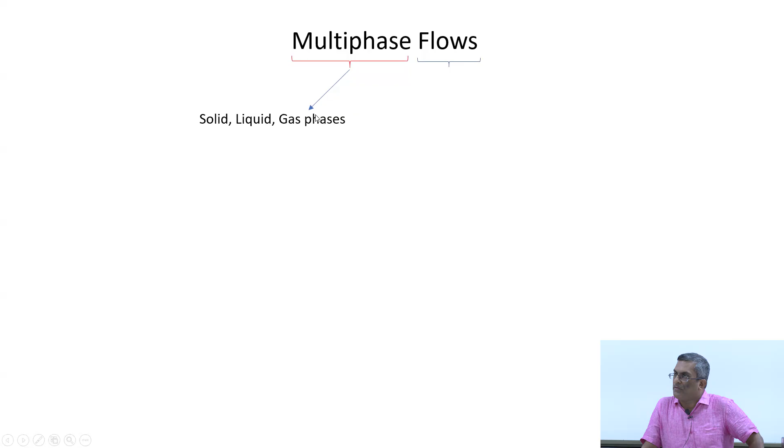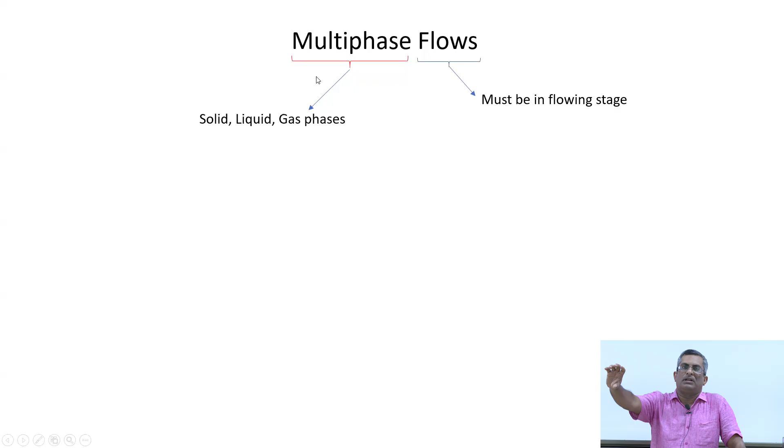Now the second term is flows. This means we must have a system which is in a flowing stage. What does flowing stage mean? Consider flow of water in porous media. Let us say you put some water in sand - the water sinks into the sand, but it actually flows through the sand. So that is an example of flow through porous media. But can we call that a multiphase flow, even though we are dealing with two phases - the solid porous medium and the liquid water? It is still not multiphase flow because we need this system to be in a flowing stage.

Another thing that needs attention is the distinction between phase and component. Are multiphase flows also multi-component flows? Here component refers to the constituents in a phase. For example, air is a mixture of gases - nitrogen, oxygen, and many other gases. These are components, but that does not mean air is multiphase. Air is a single phase flow but multi-component.

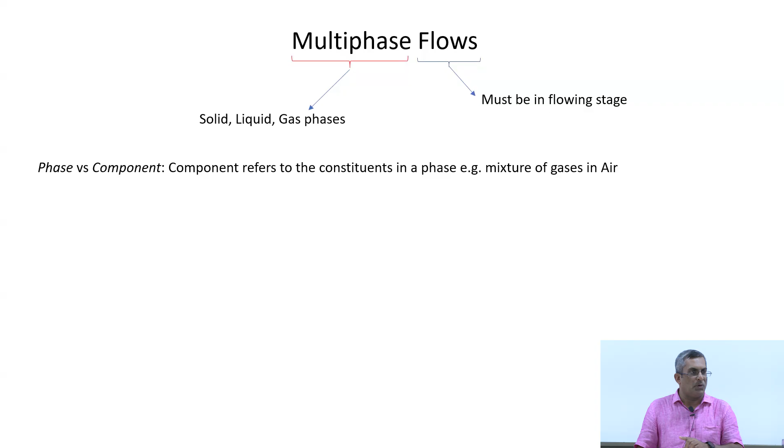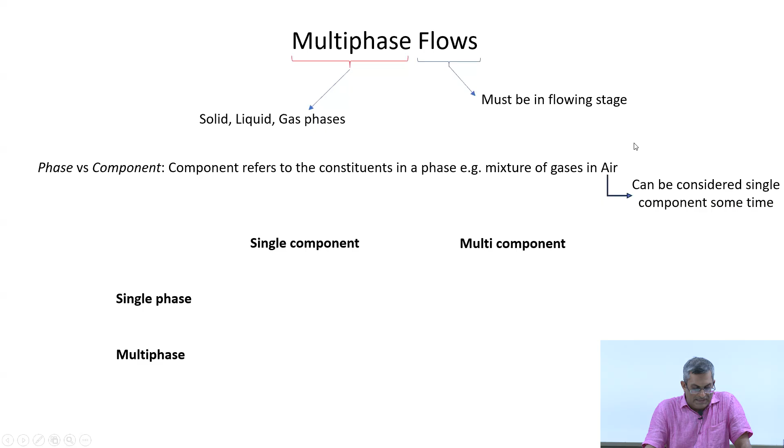So now we have different possibilities: single component and multi-component flows, single phase and multiphase flows. Can you give an example of a flow which is single phase, single component? Water, or flow of any gas - say hydrogen flowing through your burner - is an example of single phase, single component flow. Single phase, multi-component flow could be a mixture of methane and hydrogen, or exhaust gases from an engine.

What is an example of multiphase, single component flow? Steam water flow - we have water vapor in water - or refrigerant flows in a refrigerator, such as in the evaporator of a refrigerator. That is multiphase, single component.

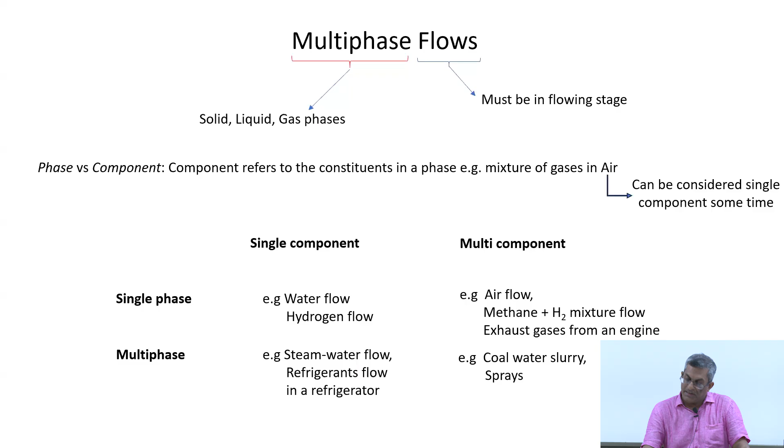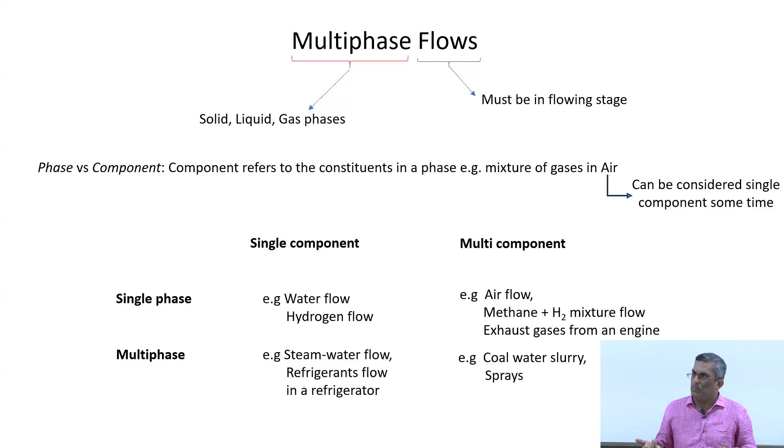Similarly, we can have multiphase, multi-component flows. For example, a spray, like the spray coming out of a deodorant. When you press the plunger, you have millions of small droplets which are injected and dispersed in air - a liquid dispersing in air. So it is multiphase as well as multi-component. Coal water slurry - coal and water - the phases as well as the components are different. So we have different scenarios possible.

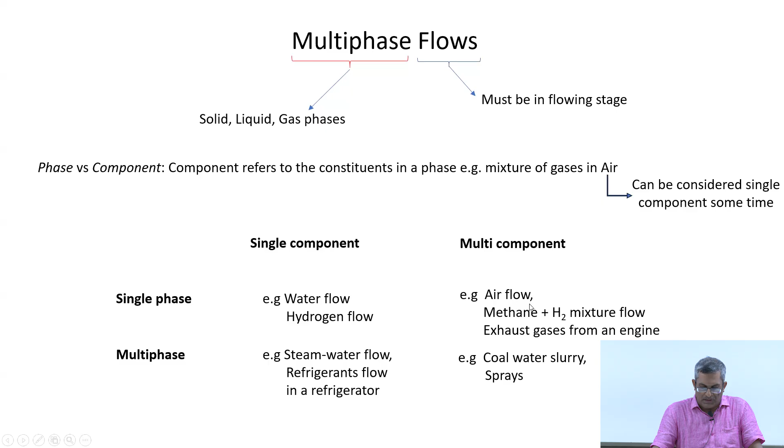Now what are the main differences between single phase flows and multiphase flows? In single phase flows, the governing equations are well established - mass, momentum, and energy equations. For gases you can also say the ideal gas law. These equations are all well known and well established, and the thermophysical properties of the fluid are also available.

What are the main concerns? Is there anything which is yet unknown? The answer is turbulence - we should not say it is unknown, but rather partly known. Turbulence and its influence on mass, momentum and energy transfer remains one of the classical unsolved problems that we know about.

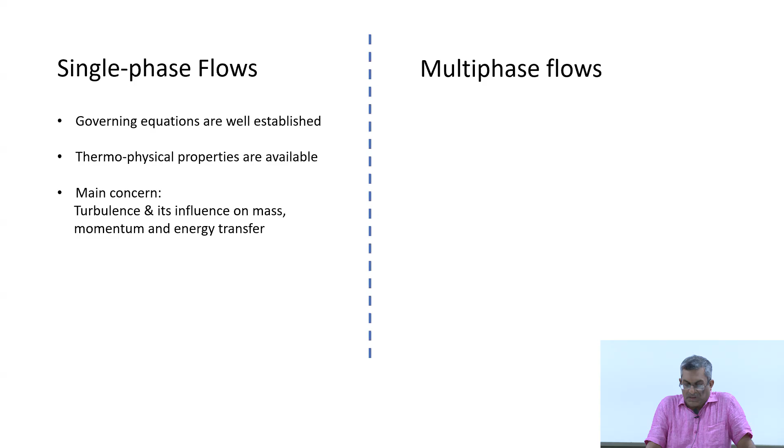Now coming to multiphase flows - the correct formulation of the governing equations is still subject to debate. Why is this so? We will see this in more detail when we discuss the transport equations for multiphase flows later. But the main reason is basically due to the presence of the dispersed phase. We need transport equations for both the dispersed phase and the carrier phase.

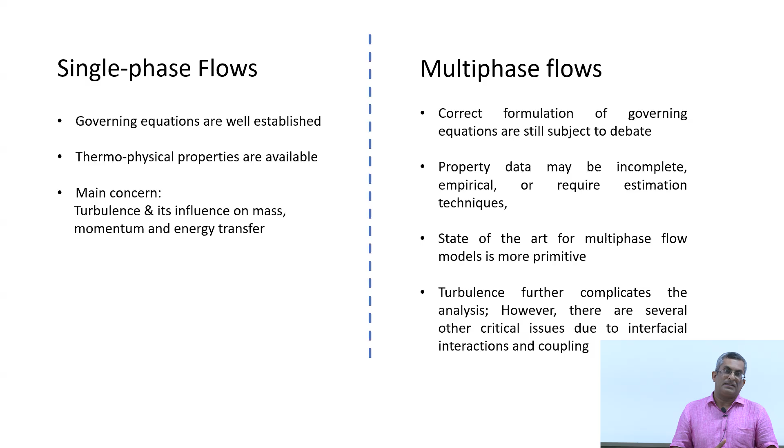They are also interrelated, and that brings in the complexity. The data on properties are incomplete, empirical, or require separate estimation techniques. And the models, the state of the art for multi-phase flow models, are still at a primitive stage. So obviously turbulence further complicates this scenario. When turbulence is not well understood for single phase flow itself, then for multi-phase flow it will bring in even more complexity. However, turbulence is not the only reason which brings in the complexity. Mainly it's because of the interfacial interactions and coupling between the phases, due to mass, momentum and energy exchange between the two phases. That is what brings in complexity.

So now we understand what multi-phase flows are. We can categorize multi-phase flows into two categories: one is dispersed flows and the other is separated flows. In case of separated flows, we still have two phases, but both phases are continuous.

What is meant by continuous? This means you can move from one point to another point in one phase without interacting with the other phase. For example, in the liquid you can move from one point to another, and the gas influences the liquid of course, but you do not have to pass through the gas. Can you think of an example of separated flows? For example, air flow over water in a pond, where you see large waves generated because of the interaction between the air and the water.

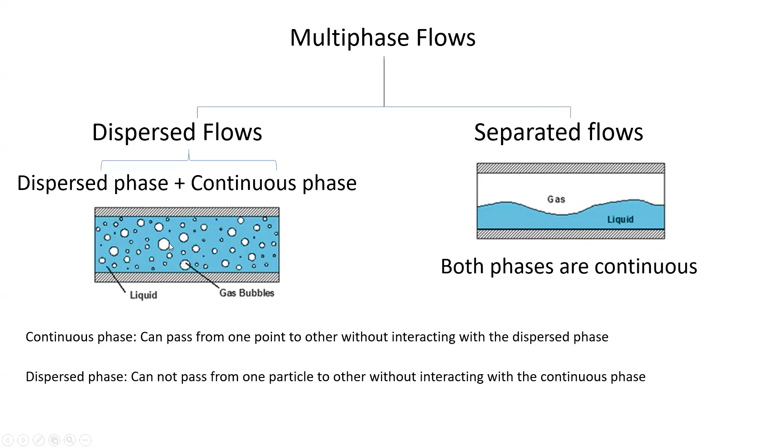Then we have dispersed flows. Dispersed flow means there are two parts to it: one is dispersed phase, one is continuous phase. In this example you can see a liquid shown in blue color and gas bubbles shown in white color. Here you can't pass from one particle to another without interacting with the continuous phase. This is a typical characteristic of dispersed multiphase flows. The dispersed phase is embedded in the continuous phase, and we need to understand the behavior of both the dispersed phase and the continuous phase at the same time. In separated flows, we also need to understand the two phases, but they interact only at the interface. That is the main difference.

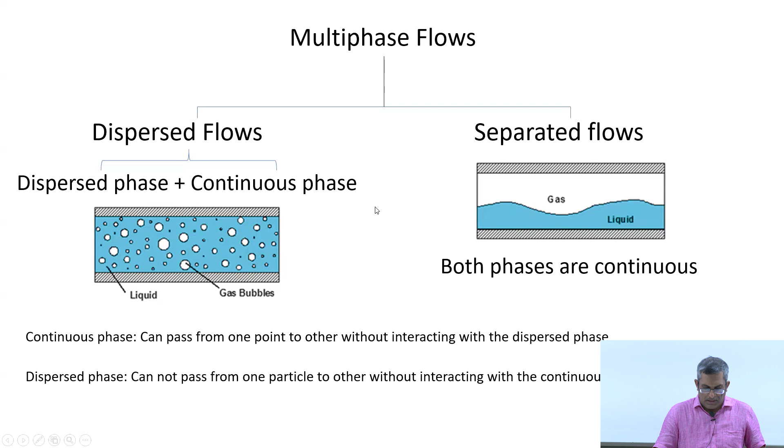But we may not always categorize flows as dispersed flow or separated flow. For example, in case of slug flows, we have large gas bubbles, and here the interfacial interactions become important, so we may not treat these large bubbles as single particles as in the case of dispersed flow. We can have even more complex scenarios, such as when we have vapor bubbles in liquid, but somehow liquid droplets are also entrained in the vapor. This kind of scenario is also possible.

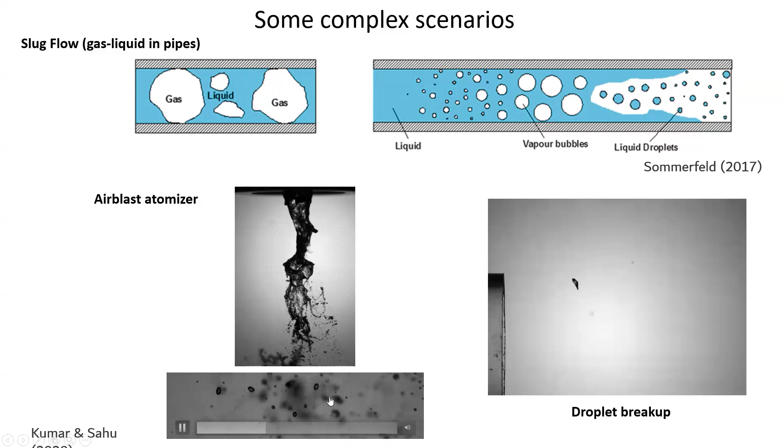Another interesting example is atomization itself in general. Here I am showing an example from an air blast atomizer. In this case you have a liquid jet injected at the center of the atomizer, but around it there is very high speed airflow that you obviously cannot see. Here you see what happens close to the injector exit, but if you go far downstream, you see the flow of droplets. Now this part we can argue refers to dispersed flow, but this one, is it dispersed flow or separated flow?

This is more close to separated flows, because here, due to interaction between the liquid and the air, instabilities develop at the interface and grow, breaking the liquid jet into ligaments and droplets. The point here is in the same device you encounter dispersed flow in some location and separated flow in some other location. So the analysis has to be different accordingly.

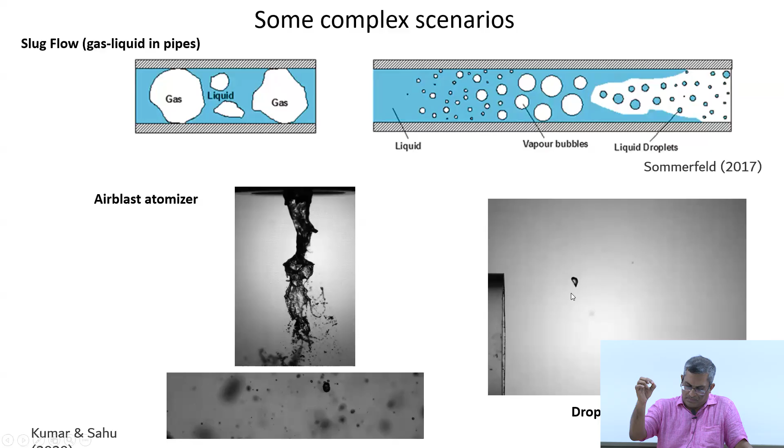This is another example where you can see the breakup of a droplet due to high speed airflow. Here you have a high speed airflow coming from an injector from left to right, and a droplet is introduced into the flow, and the droplet breaks into multiple smaller droplets.

So, what do you think, how do you analyze this? First part, till the breakup process starts. So till the breakup process starts, you have injected the droplet, and it deforms. As soon as it interacts with the air, it deforms and then breakup starts. Till that point, it may be possible to analyze that as dispersed multiphase flow.

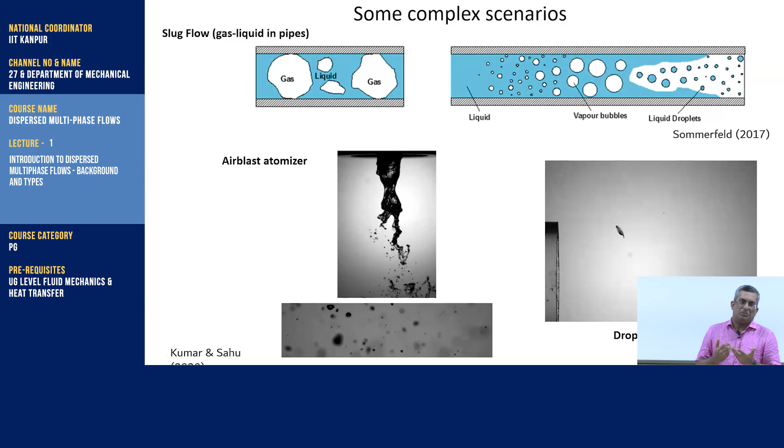But once it starts to break, you have to consider the instabilities which cause this breakup. Once the breakup process is over and you have all small droplets generated which don't further break up, that part can again be considered using the dispersed multiphase flow analysis. So this kind of scenario is also possible.

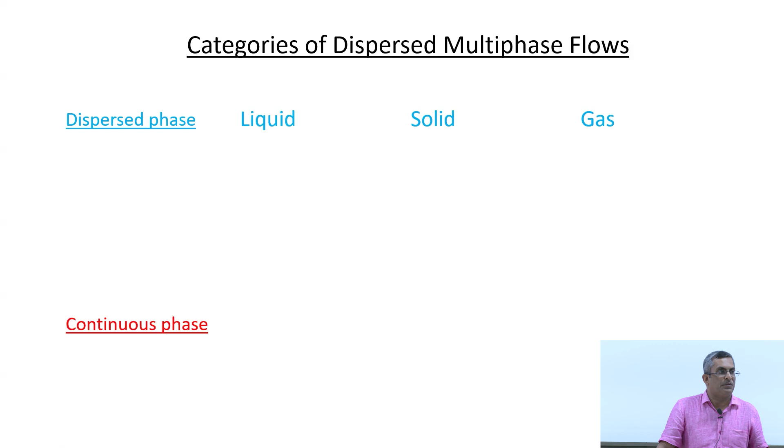Now we will look at various categories of dispersed multiphase flows, different possibilities. We know that the dispersed phase can be solid, liquid or gaseous phase, but the continuous phase can be only liquid or gas. So now we will see different combinations.

So, liquid particles in liquid flows. Any example? Let us say you put some oil in water and you stir it, then the flow may mimic - it depends on how well you are agitating - here we are referring to emulsions. So, liquid particles in liquid flows.

Then liquid particles in gaseous flows. Any example? Humidity? No. When you talk about humidity, you are referring to the water vapor present in air, you do not have different phases. Any example? Rain, rain formation.

Then solid in liquid, solid particles in liquid. So we have many different types of slurries, we'll look at all this in detail later. Then we have solid in gas, solid particles in gas.

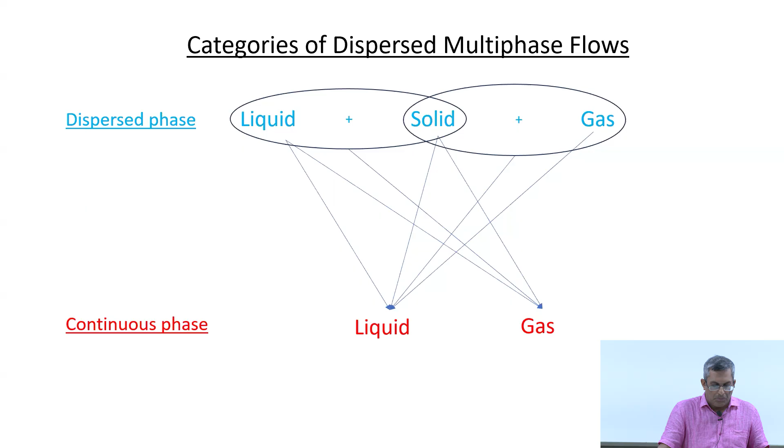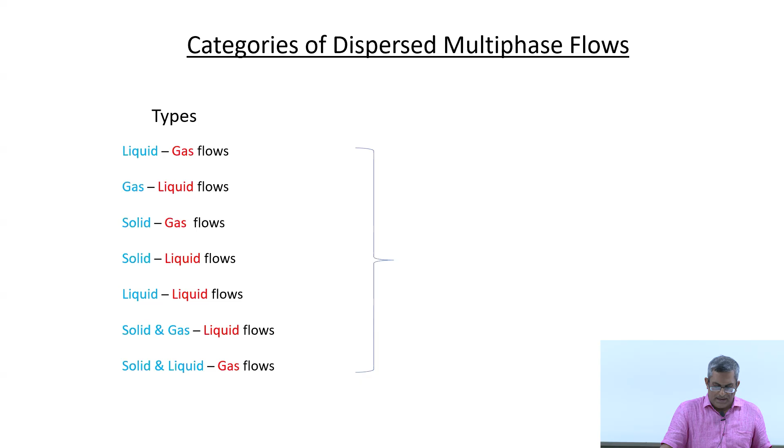Now I will take you through various examples where we encounter multiphase flows in these different scenarios. So based on our discussion, these are the different types of dispersed multiphase flows that we can encounter, and they have wide range of applications ranging from energy propulsion systems to manufacturing, processing, process industries, transport systems, nature and environment, medical and agricultural applications. Let us see one by one.

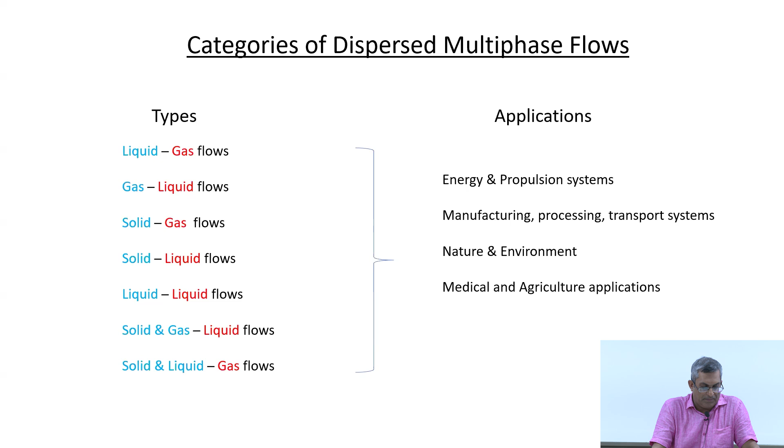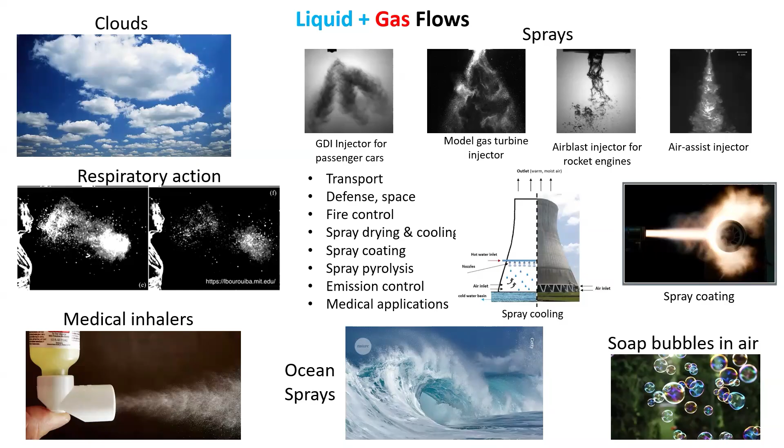This example is also interesting, that is soap bubbles in air. This does not come under the category of gaseous particles in liquid. Here basically each bubble—what do we mean here, the soap bubble—we have a thin film which traps some air inside it, but the trapped air behaves differently than the surrounding air, because that air itself behaves like a particle, since it has to be transported along with the soap bubble. This is a very interesting scenario we have.

The other example is cavitation. So what is cavitation? Cavitation is a phenomenon where locally the pressure reduces below the saturation vapor pressure, and that is how the phase change takes place, and we have generation of bubbles. Cavitation is a main concern in many applications, for example in pumps and in fuel injectors, especially in diesel engines where we tend to inject the liquid at very high velocity.

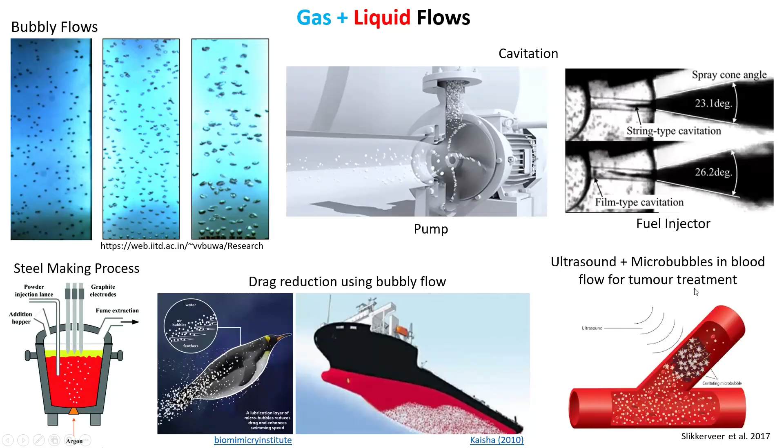The other interesting example is drag reduction using bubbly flows. This is known as—there is a typical name for this kind of penguins—which generate micro bubbles to reduce the drag such that they can swim easily in the sea. It is well known that the generation of micro bubbles reduces drag, and this is used in ships for drag reduction. Also, combination of micro bubbles with ultrasound in blood flows is used for tumor treatment.

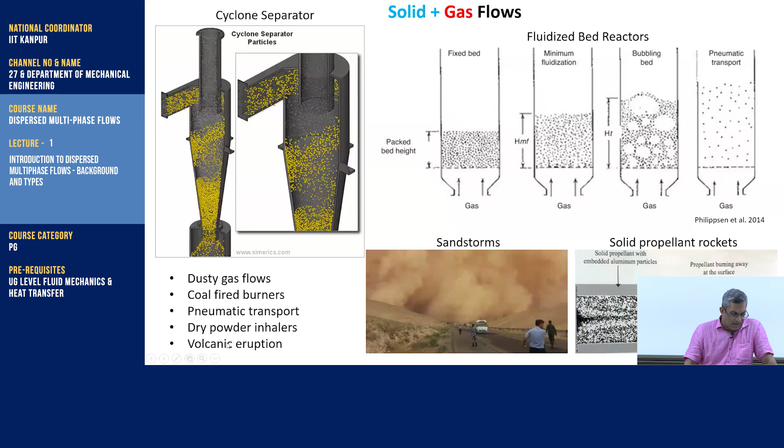Then we have dry powder inhalers, we are familiar with that. And also another natural example is the dispersion of ashes which comes out from volcanic eruptions.

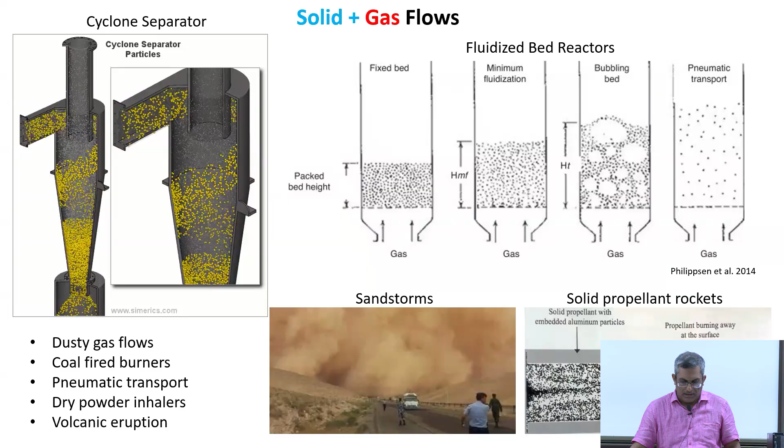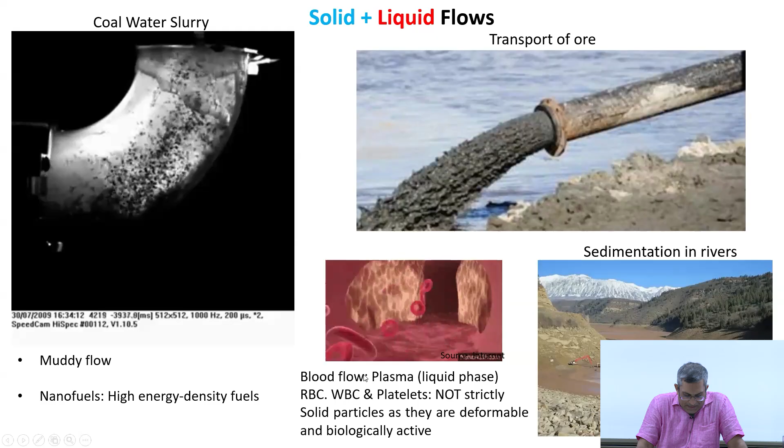And then one can ask, how about the blood flow? We know that actually blood is not a single phase flow. It has the liquid phase, known as the plasma, and it contains some particles also, which are red blood cells, white blood cells, and platelets.

However, usually this does not come under solid liquid type of flows, mainly because these are not strictly solid particles, because they can deform, and also they are biologically active.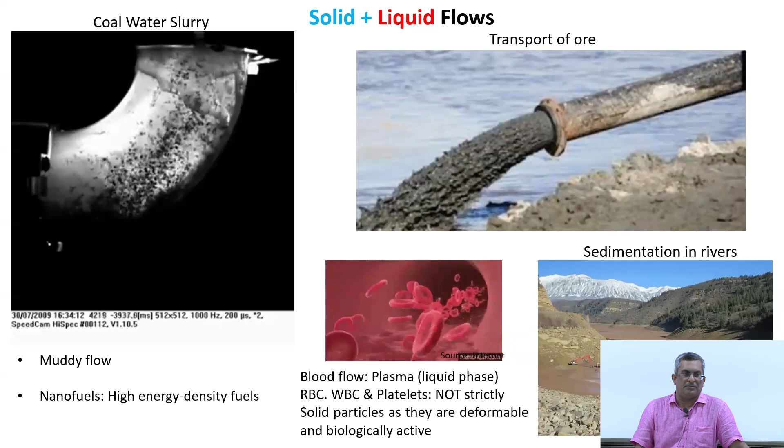So then we have liquid-liquid flows, as I mentioned earlier, emulsions. Here emulsions refer to a colloidal system of mixture of two or more immiscible liquids. We basically stabilize this mixture in some way. Why am I saying stabilize? Let us say you put oil in water.

Obviously, due to the density difference, they will be separated. But if we agitate it and use some surfactant, and break the oil particles into very small droplets, then it is possible to stabilize the oil particles in water, for example. This is known as emulsion.

Emulsions have a wide range of applications, mainly in chemical, food, and pharmaceutical industries. Different possibilities exist: oil in water, water in oil. We can have even more complex scenarios, oil in water in oil, and similarly, water in oil in water.

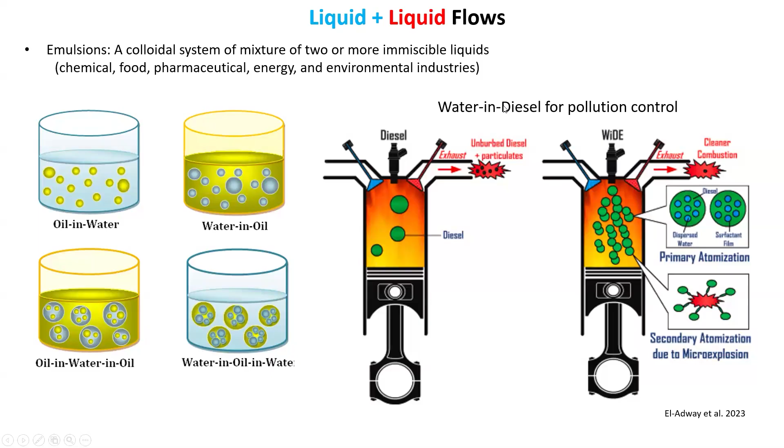One practical example is water in diesel emulsions, used for pollution control. The idea is that in diesel engines, if we inject this emulsion fuel instead of diesel only, but carrying small water particles, then when these droplets burn, the water also gets evaporated and absorbs the heat. So it reduces the temperature, and the NOx level can be controlled.

Here we have diesel droplets in the combustion chamber, and here we have the emulsion droplets in the combustion chamber. As far as the dispersed multiphase flow is concerned, that does not make much difference. The difference will be in terms of the properties of the two fuels, but still in both cases we have particles - in one case diesel, in the other something else - and we need to understand the transport behavior of those particles.

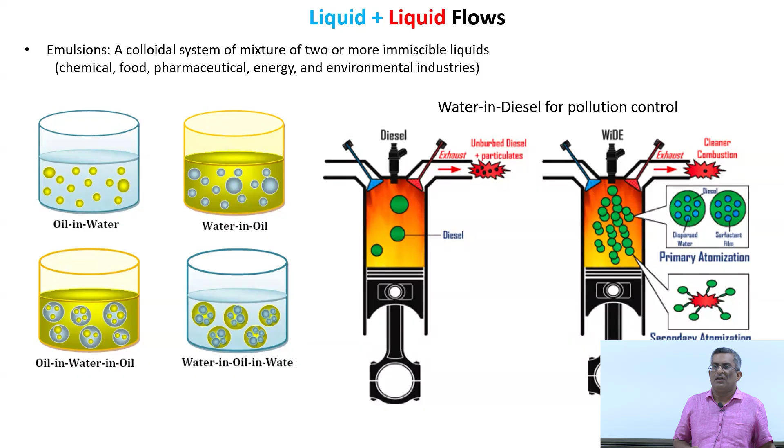But these kinds of liquids can have their own physics associated with them. For example, while a diesel droplet, if you burn it, its size will constantly or monotonically reduce with time as it evaporates. But in case of emulsion droplets, that may not happen, because you have water inside it, and it undergoes vigorous oscillations. You will see large changes in diameter and fluctuation, and it may also undergo something called secondary atomization, where it gets scattered into small droplets. So those things exist.